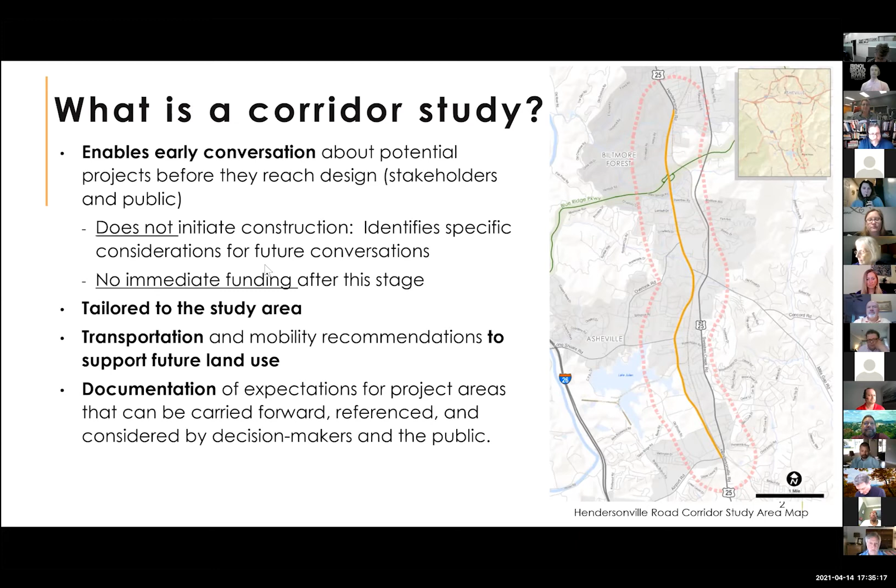Okay, fantastic. Let's go to the next slide, please. So why Tunnel Road? One of the mechanisms that led us to select Tunnel Road for a potential corridor study was that this area was identified in a couple of different ways for potential improvements.

One, it was identified for congestion mitigation improvement considerations. It has also come up through the SPOT process, which is an MPO related, data-oriented method for prioritizing future projects and incorporating them into the TIP.

We've also had conversations with other community members where Tunnel Road often comes up as a hotspot. We want to further those conversations in a positive way, because we know this area is both a regional economic driver and an employment center, and looking at current development practices and attention of late, this area is going to experience a redevelopment in the near future.

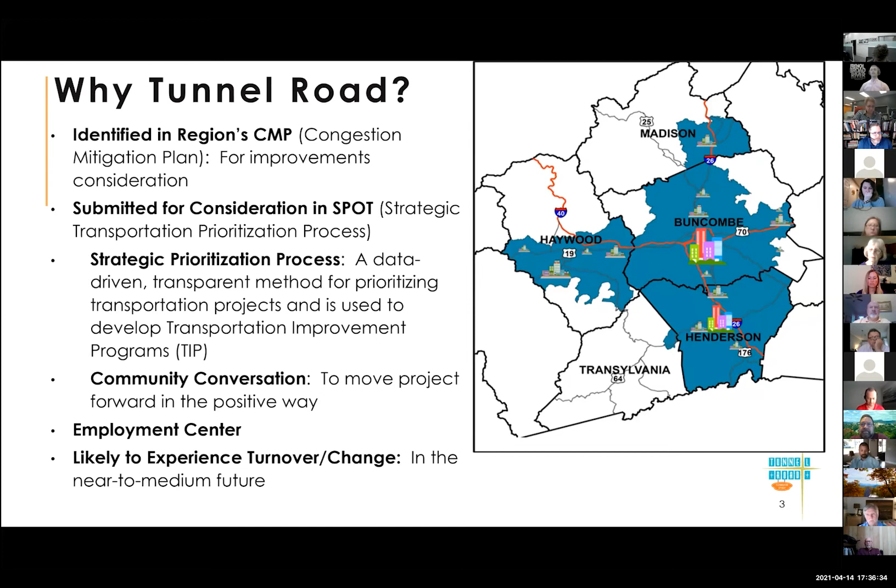So how did we get here? The corridor study program is a partnership with the French Broad River MPO, Buncombe County, the City of Asheville, and we work in conjunction with our NCDOT partners. The corridor study program started last summer. There are actually 2 projects currently being studied by the MPO, and a 3rd sister project being managed by the City of Asheville. What these corridor projects really do is the homework before we even start to consider any future potential actual project that would require funding or construction.

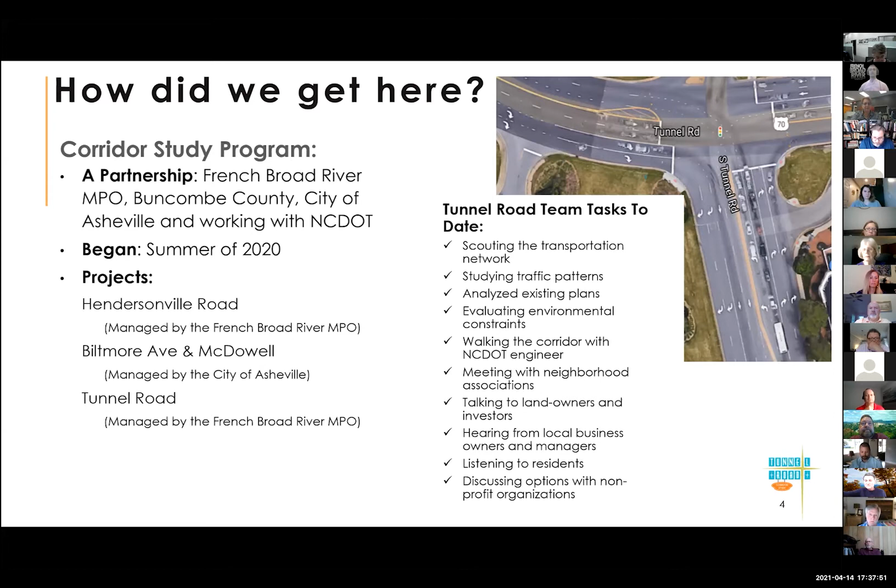So there's been a lot of that kind of homework being done. We've had our consultants study the transportation network, analyzing plans and environmental constraints. We've walked the area with NCDOT partners, as well as met with a lot of interested neighborhood associations, landowners, business owners, managers at various establishments, and listened to neighborhood community members as well as nonprofit organizations. So we've been doing a deep dive into this very small couple of miles, not even a 2-mile stretch, identifying the key items.

So on that, I am going to turn it over to our fantastic consultant team led by Yolanda. So please, Yolanda, take it away from here.

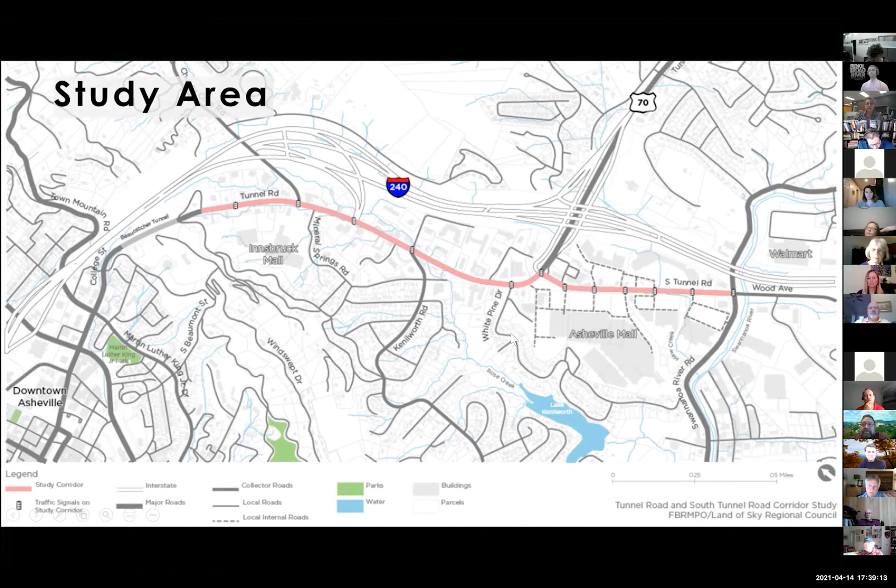We look at things like what the land uses are today. The map on the left shows all the red around Tunnel Road, and most of it is red because that stands for commercial. Not very many people are actually living on the corridor. In fact, according to the census we drew these numbers from, only about 240 people live along the corridor. You can see the right of way for I-240 there. But what's particularly striking, if you look at the area outlined on the map nearby, is that those few people are really working either downtown or at the hospitals nearby.

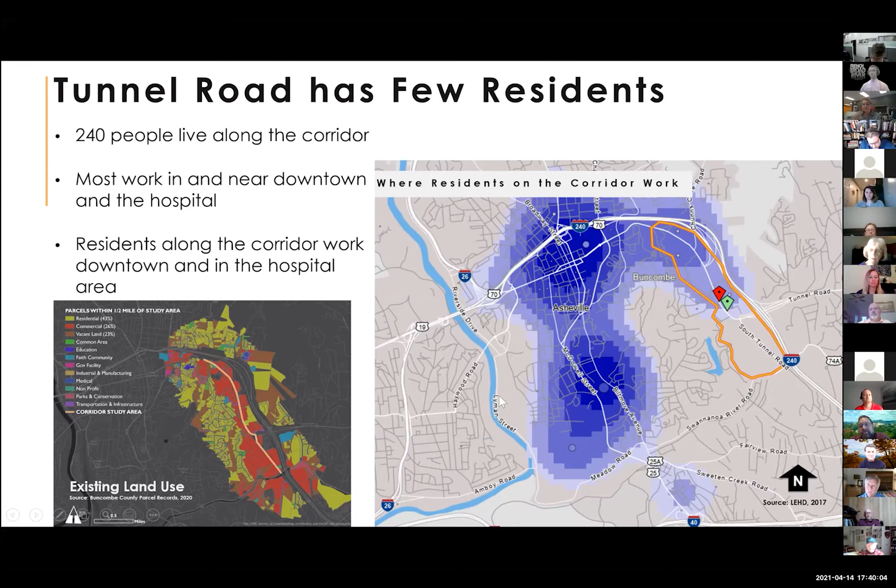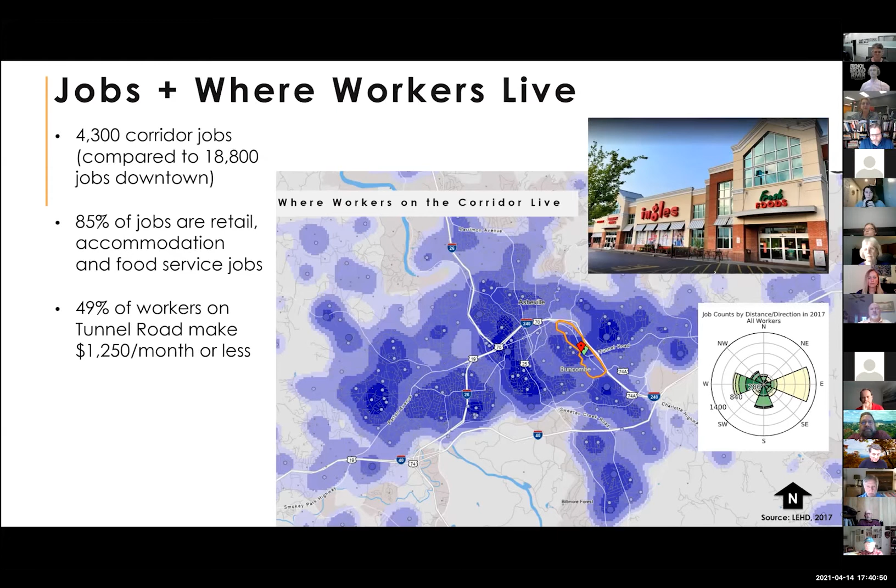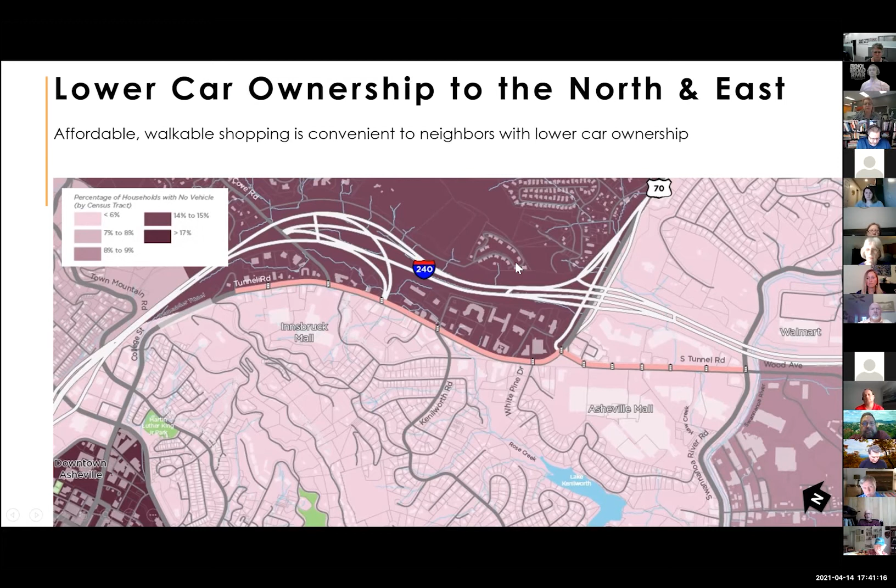We also see, according to 2017 census numbers I believe, that there are areas north of the corridor where people are living who are in high, low, or no car households. The darker color indicates that 14 to 17% of people have no access to a vehicle in the home. So they're counting on transit, walking, and biking to get around.

The corridor itself has a transportation function. One of the ways we look at roads is, what do they need to do? And this road needs to do quite a lot. It's an alternative for Interstate 240. The northern part of the road has a higher functional classification in the system than South Tunnel Road, which is considered a minor arterial. And it's critical for Asheville transit, ART transit.

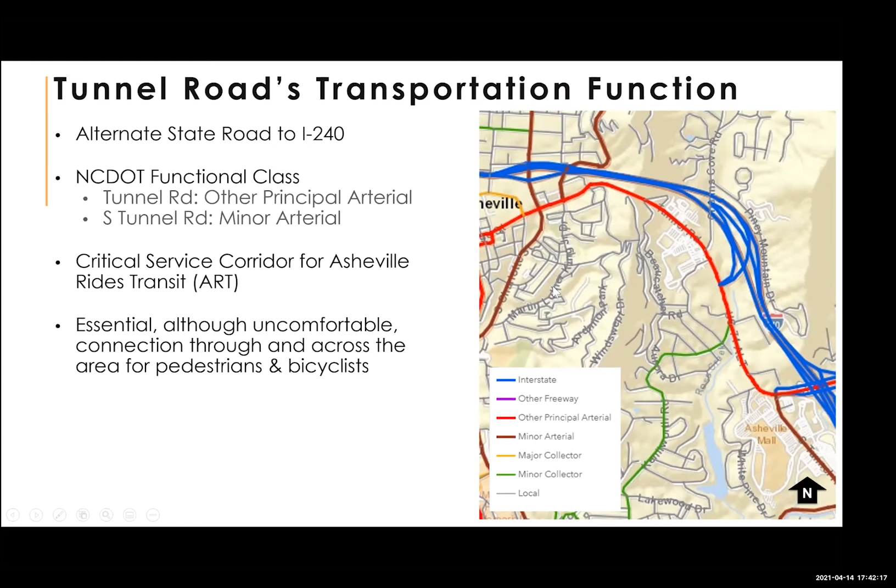There are many lines that traverse the corridor, and people are counting on it to get around the region on transit. It's really a major conveyor for people who need to get from place to place. And it's the only access for cycling, because the road network isn't very well developed. Christy Stout is going to be talking about that in more detail in a minute.

We also look at the demand on the road in terms of average daily traffic and how many lanes there are to accommodate that traffic. On a road like Tunnel Road, getting access to business is an important part of its function as well, and there's a certain dynamic that happens there. Essentially, the traffic numbers grow as you go south, and the road itself is larger in the middle, able to accommodate left turns, whereas as you get closer to the interchange at I-240 and South Tunnel Road, traffic is the highest in the area.

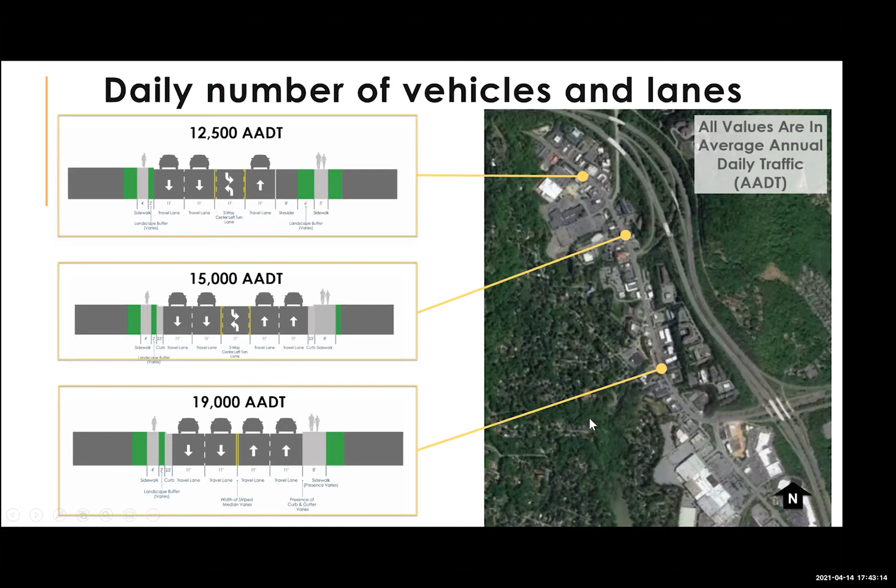I'm going to show you what happens here. Can folks see this? If you look up in the top corner, it's telling you time of day, and the colors are changing from green where nobody is. South Tunnel Road is showing traffic speeds getting lower because there's more congestion, turning red for a good part of the day. So there is some congestion, which many of you experience on South Tunnel Road. But by and large, Tunnel Road itself, north of South Tunnel Road, is generally pretty free flowing, and sometimes the speeds get high there.

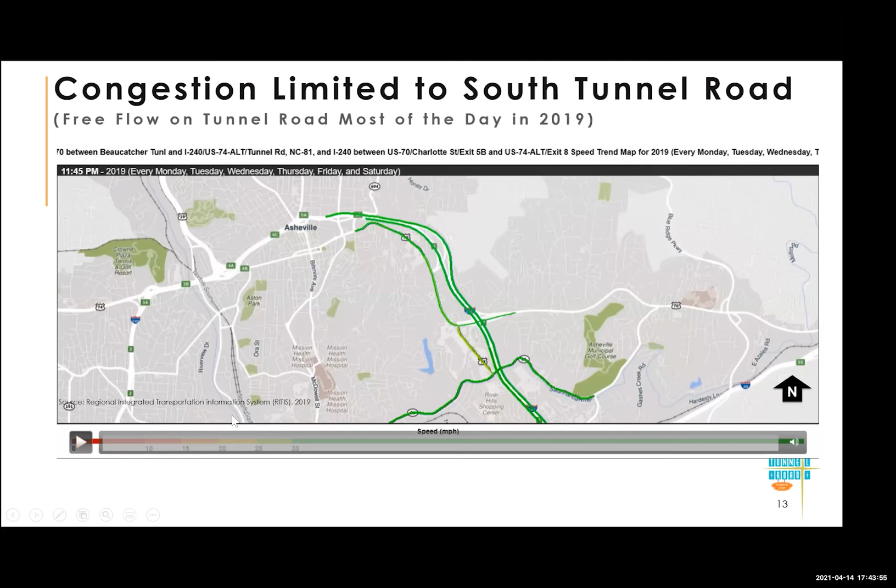So what I'd like to do at this point is turn this over to Christy, who's going to do a deeper dive into some of the transportation data that we saw and how it's affected some of the goals of our work.

So, Christy Stout. Thank you, Yolanda. What I'm going to go through briefly is to touch base on, in our initial review of this corridor, some of the issues we found and how they feed into this process as far as how do we determine what we need to do to fix any current issues. So I'm going to cue this up and hand it over to see if that matches what we're hearing from people's experience along the corridor. Then JP is going to step through more of what did we do with that information, and what are we looking to do to provide some solutions.

One of the key elements we've really been tasked with is how do we tee up this corridor for better integration of land use and the transportation network - not just our existing land uses, but the future land uses. The photo on the right is an example of what was previously proposed for the Asheville Mall redevelopment. The issue is we have to accommodate those future developments, but also get ahead of that. If we need to fix the transportation network, you don't want to be widening a road into a building that was just built last year. So it's preparing for those partnerships and ensuring that the system is safe and efficient.

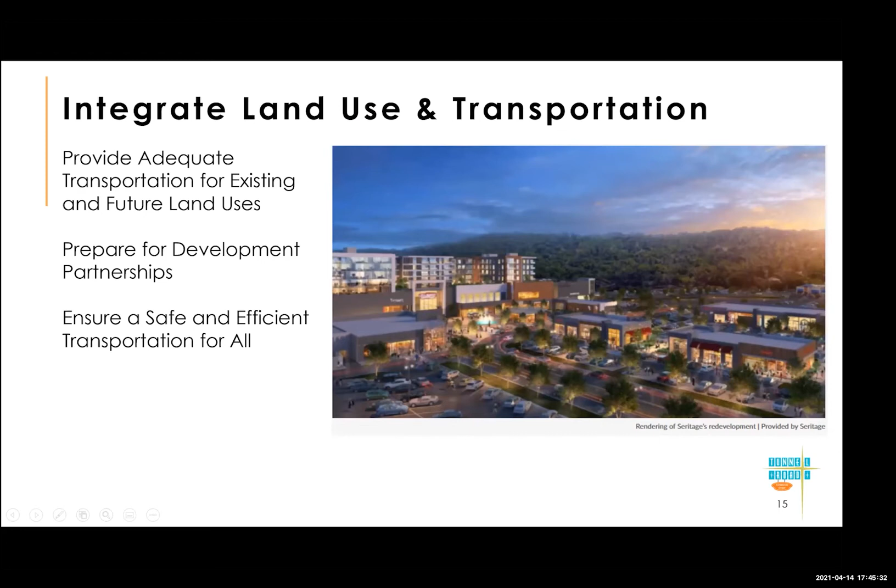A lot of these next slides really focus on that merge between safety and efficiency. So this slide, we took a look at the safety along the corridor, and this one's really telling. If you look at the number of crashes that occurred in the various segments, starting at the left near the tunnel, from the tunnel to Chunns Cove Road, there were 84 over a 5-year period. Going to the right, you'll see the different segments and how many crashes were reported. That involves a vehicle being towed from the scene, and it gets reported through the police files.

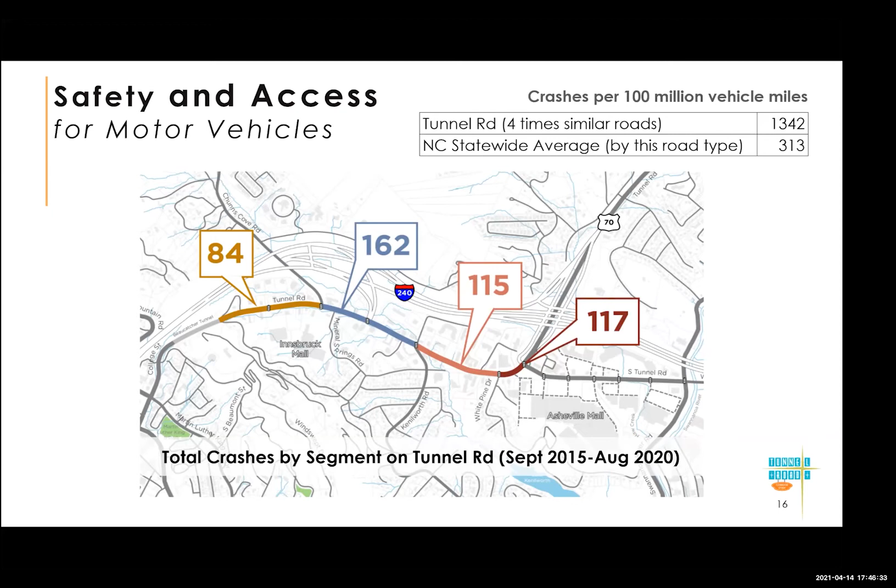So Tunnel Road, when you look at the entire corridor from the tunnel to South Tunnel, had an average crash rate - this is how we look at things in our industry - of 1342 crashes per 100 million vehicle miles traveled. It's a calculation we do based on the amount of traffic that's out there and how many crashes occur. The statewide average for a roadway like this, with 4 lanes of traffic and a center turn lane, is 313. So it tells you we have an issue here - this is over 4 times greater than what you would tend to see with statewide averages for a corridor like this. In the next slide, we look a little bit more at what is the source of that.

One of the things we started looking at, and I think it's obvious to most folks if you've driven this corridor, is the number of access points along this corridor. What I did here is just took one driveway and showed you how many conflicts you could potentially have for a vehicle turning right or turning left out of that driveway, turning left in and left out. And there you have 13 conflict points if you include pedestrians.

This does not include cyclists. So if we had bike lanes, that would even be more. So if you take that 13 for one driveway and you add 10 in a short period, you're up to 130 conflicts, not even considering driveway to driveway conflicts.

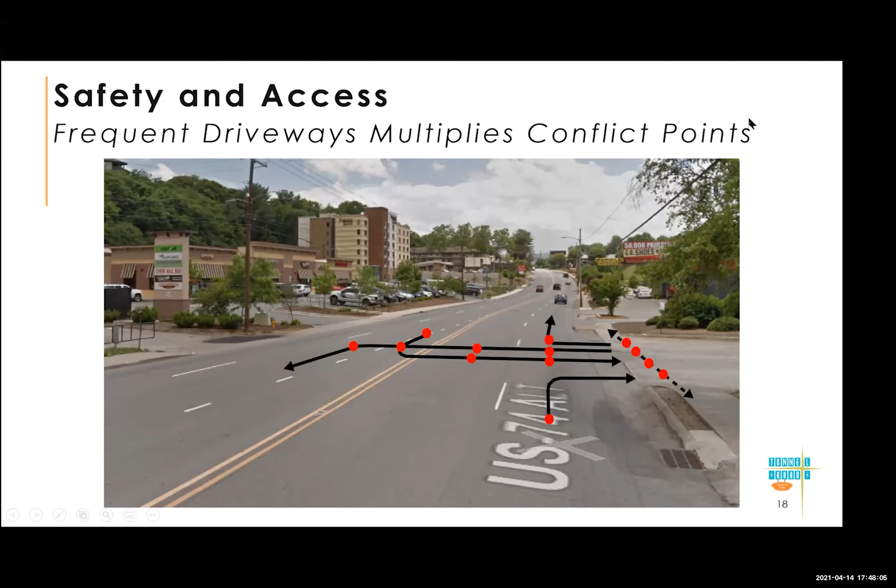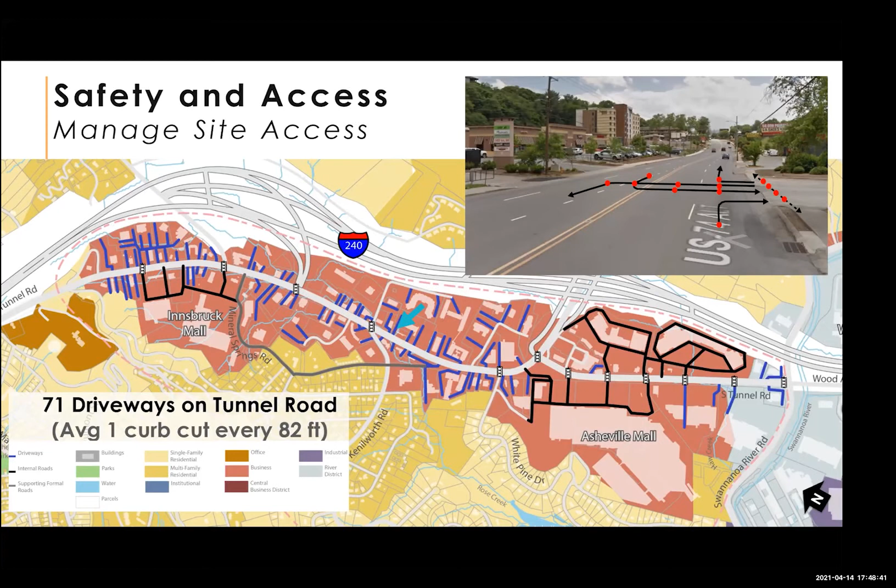So this next slide really does a good job of showing you what's going on here on Tunnel Road, and this is really likely the source of a lot of the crash rate issues. The light blue lines here on this map are the little signal indications, and the blue lines are all the driveways. Over Tunnel Road, not South Tunnel Road so much, you can see that's much better as far as access spacing. There are 71 driveways on Tunnel Road, and that's a curb cut every 82 feet. So it just gives you an idea of what we're looking at.

So it's like we need to fix some of these issues that are contributing to safety and congestion. So that's the safety and access piece, broadly. And then there's also, Yolanda kind of queued this up.

So some of the things we need to look at is how do we improve access for all, not just those that have a vehicle. Some of that will involve fixing sidewalk gaps, improving bus stop amenities, improving crossings so people can get to the bus. I'm going to go into that on this next slide.

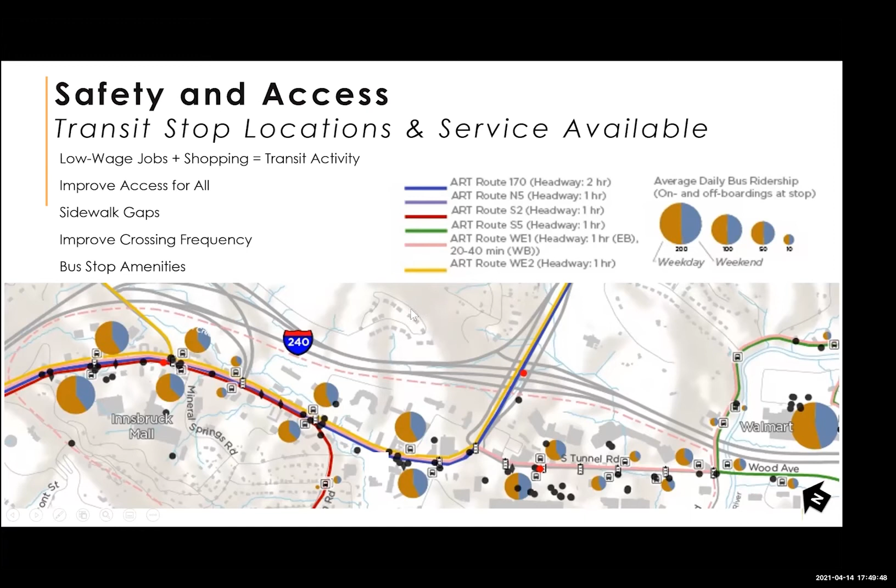So that kind of fuels the whole bicycle and pedestrian element. And is that safe? Are people able to get to transit safely?

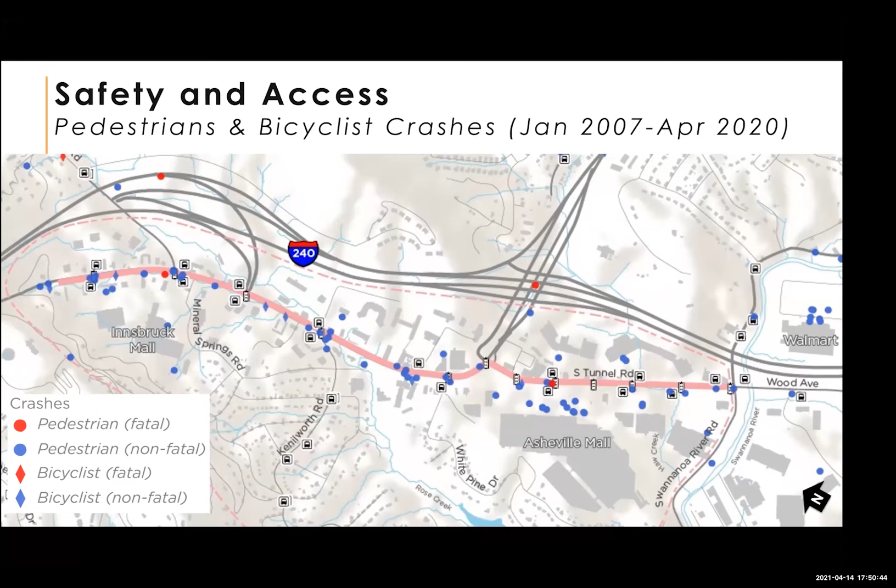And so this next slide shows why that's important. If you can go back one, Yolanda, it was regarding the crossings. So you can see in that photo in the top right, yeah, the crossings photo, next one.

So I'll talk about it briefly until she gets there. It's the next slide, Yolanda.

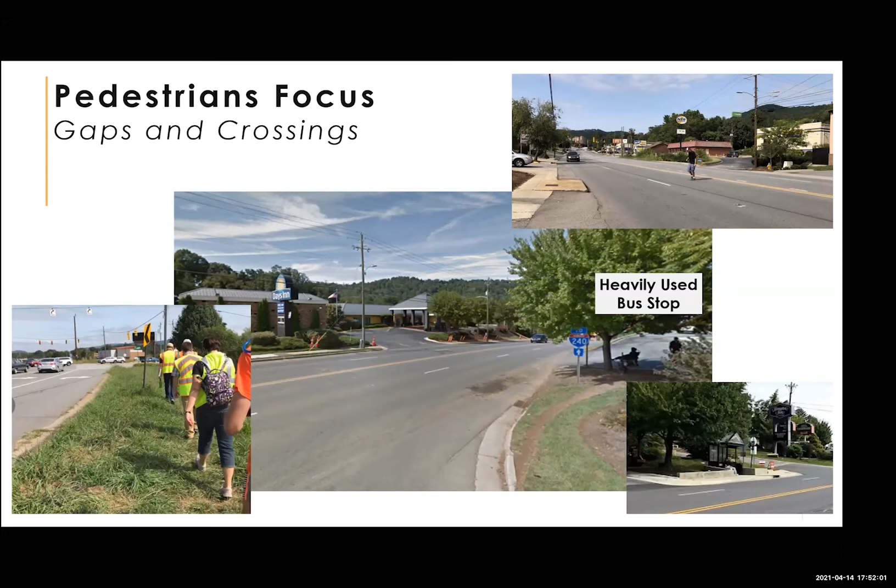You can see the photo there on the top right. There are 3 folks jetting across the road, over from the Fairfield Inn to where the Waffle House is. You think, well, why can't they just use the signal? You can see the signal in the picture. If someone starts at the Fairfield Inn and wants to walk to the Waffle House, that's 1,300 feet of extra walking, which at a normal walking pace could be 6 to 7 minutes. Add sitting at the signal waiting for it to turn green, and it could be a 10-minute diversion when all you want to do is walk across the street.

If we don't get those crossings frequent enough, you're going to be encouraging people to cross illegally. That is really something we look at when we're trying to improve pedestrian safety.

And so with the next slide... There's a little lag, Christy. I'm sorry. Sure, that's fine. Thank you, I know these are always tricky.

The last thing we're really looking at in developing the solutions, and you'll see how this all plays together, is the lack of bicycle facilities. When you look at that network map that Yolanda showed earlier, this corridor is a primary route for transportation, and it is a gap for cyclists. There's really no way to get through town in this area that's flat, safe, and efficient. So there are limited alternative routes.

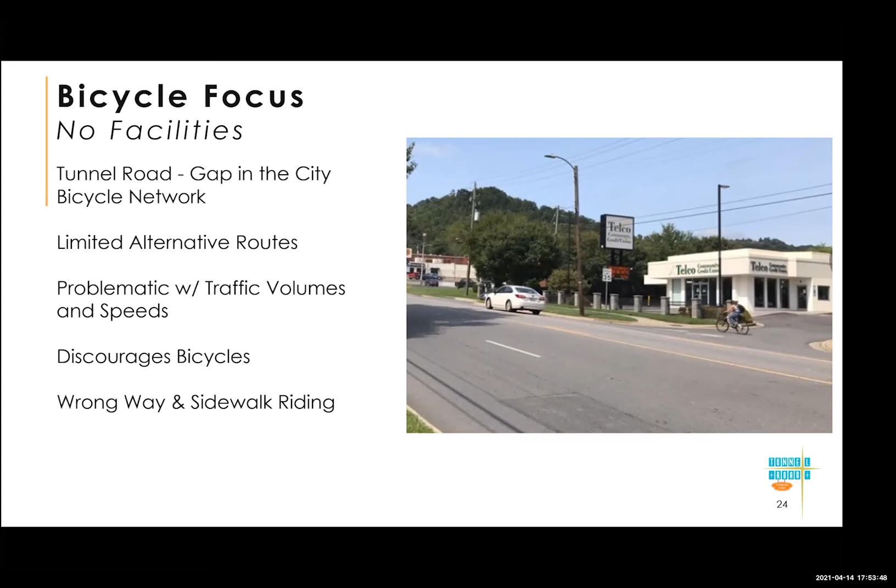Well, there is a walkable, bikeable vision for this corridor, and we need to develop a system to support that vision. So from there, Christy's going to talk a bit about whether that aligns with what we're hearing from you all, and I'll turn it over to her.

Great, thanks Christy. So I'll cover the engagement process. Before I go through the slides, I want to address a couple of comments that popped up in the chat box about Homeward Bound's acquisition of the Days Inn. We're well aware of that and have had multiple conversations with the Homeward Bound folks and with the city, trying to make that area one of the catalyst project areas, just because we know it's a dangerous crossing. It's across the street from Asheville Terrace, and we're introducing a lot more pedestrians to that area. I just wanted to acknowledge that.

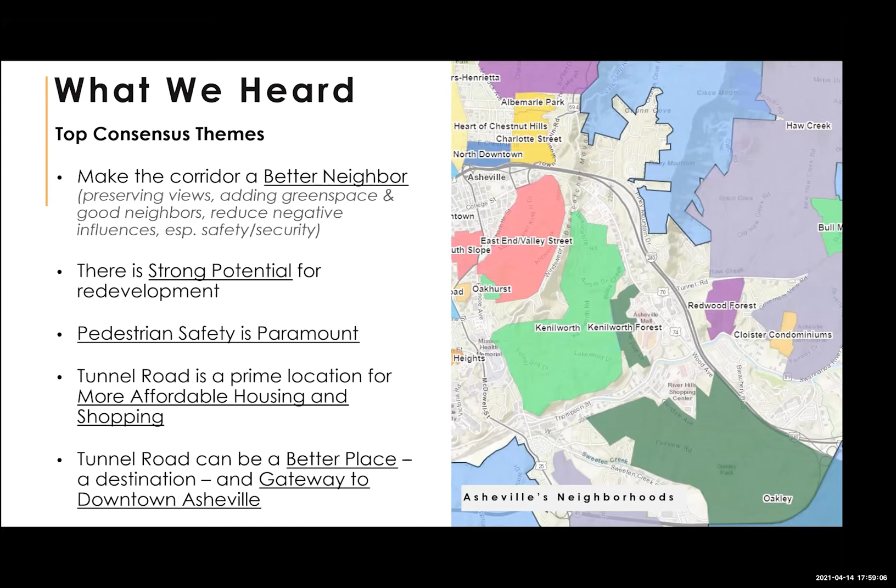And then, so now I'm going to hand it back over to Christy, or is it JP now? JP.

Great, thank you, Christy. So with this, we've talked about where Tunnel Road is today, a little bit of that analysis, along with some of the input we've gotten and how we've tweaked that into our transportation recommendations that we're presenting tonight.

Part of our recommendations are beginning to say, well, how do we begin to align those? How do we begin to align some of our solutions with some of these network solutions? So as we do that, I want to take you through a little bit of the geography and topography of the area.

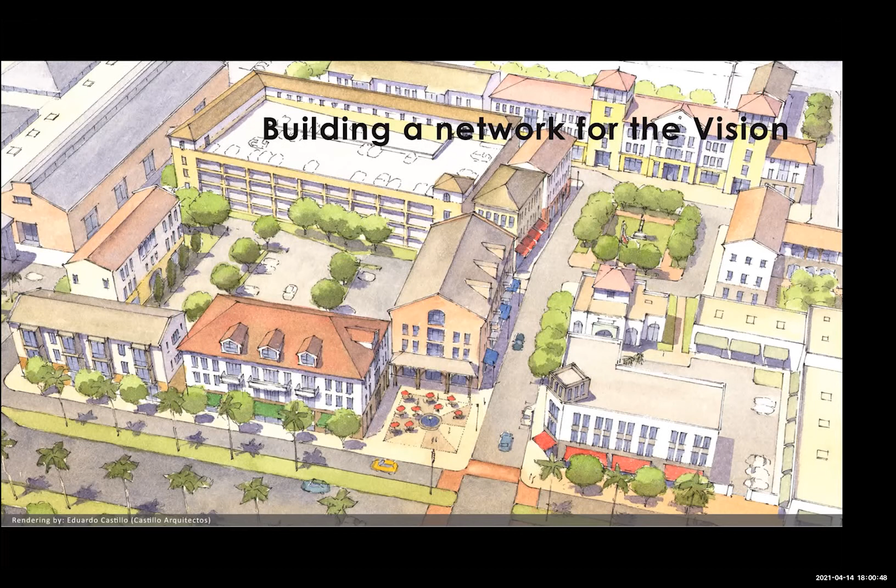Most of you are familiar with the mountain ranges, Piney Mountain and Beaucatcher Mountain on each side. So Tunnel Road sits in between these two mountains and forms the foothills and the valley between them, as well as draining downwards towards the Swannanoa River.

You can see that Tunnel Road sits as this low spot in the valley and foothills, and also the way that I-240 wraps around and parallels it going into downtown creates a bit of a barrier. That creates a very unique landform and development footprint for what we have.

It creates a larger area where we have land on both sides of Tunnel Road - that's node 1 - and then down by the Asheville Mall and some of the developments on the other side of South Tunnel Road, node 2. And then there's this really skinny spot where the topography, the interstate, and some of the grading and existing residential neighborhoods create a very thin spot, which I'm calling the connector.

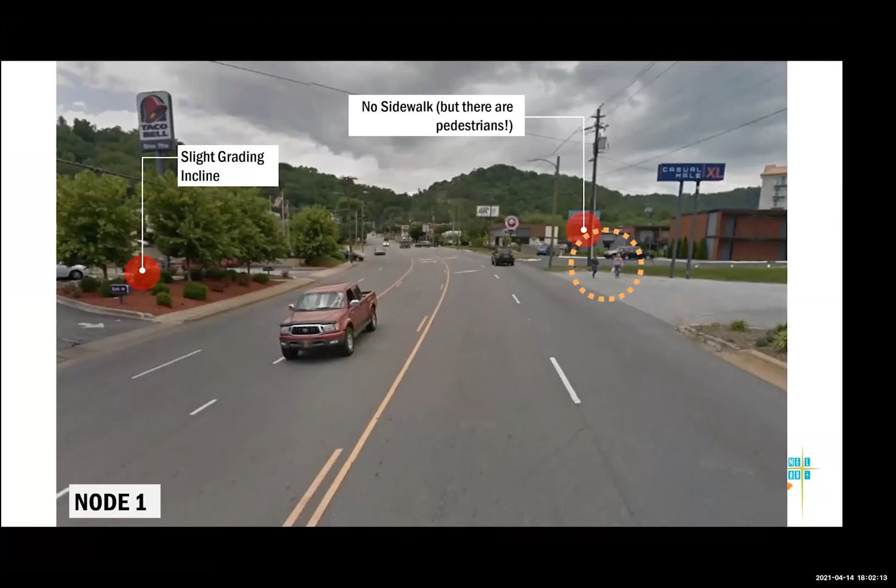We can see that on the ground. This is in the northern portion adjacent to the Innsbruck Mall, and off in the distance is where Tunnel Road actually becomes a tunnel and heads towards downtown. You can begin to see a slight grading incline coming in on the roadway. And to the points made earlier, you can see a couple of pedestrians walking with no sidewalks on that side of the road.

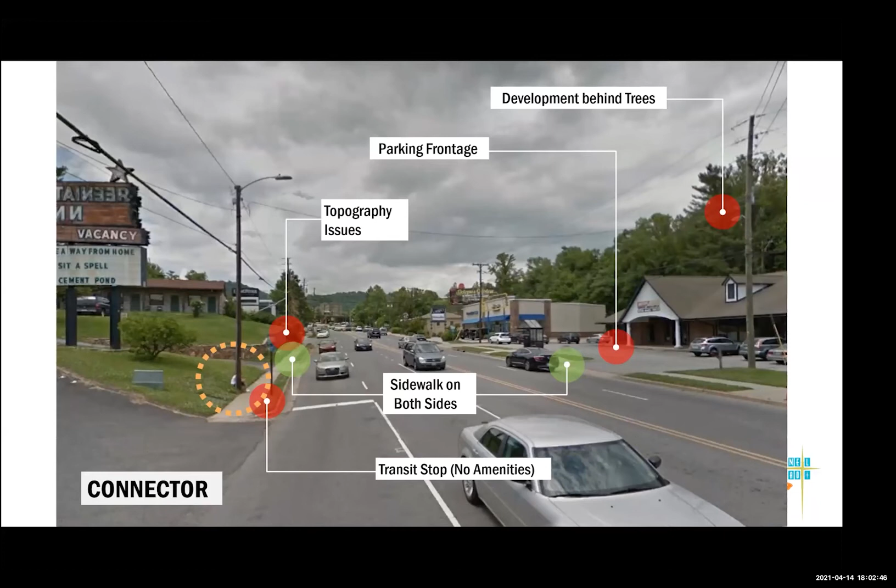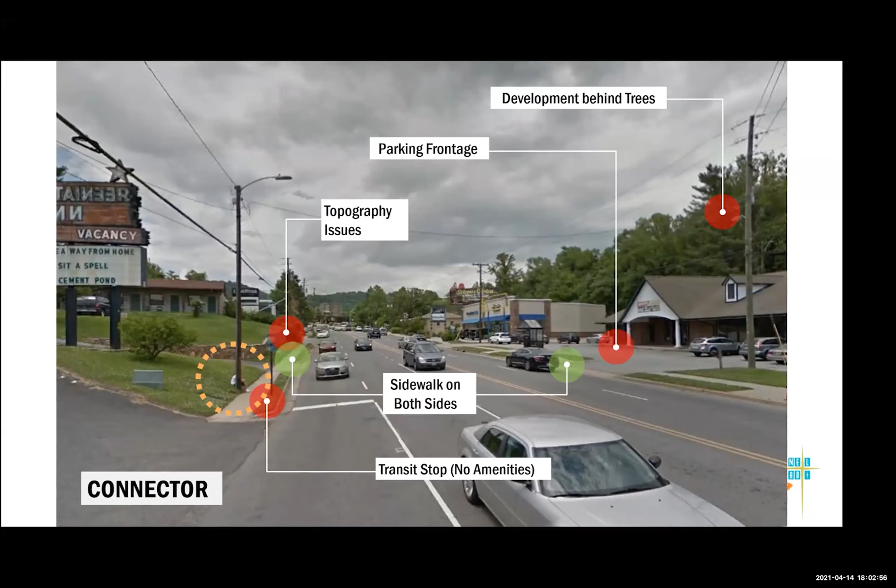Coming into the connector, or that long neck piece, you can see how there's development behind the trees on the right side. So that's a very steep decline, and then it hits a couple of those commercial properties. That is the depth of those properties to the tree line from the roadway.

A similar thing is happening on the other side as it starts to slope up towards Beaucatcher Mountain. Here we do have sidewalks on both sides, but some of the topography issues have created a situation where walls have to be built for the roadway to come through, creating really tight pinch points for trying to do anything on the street.

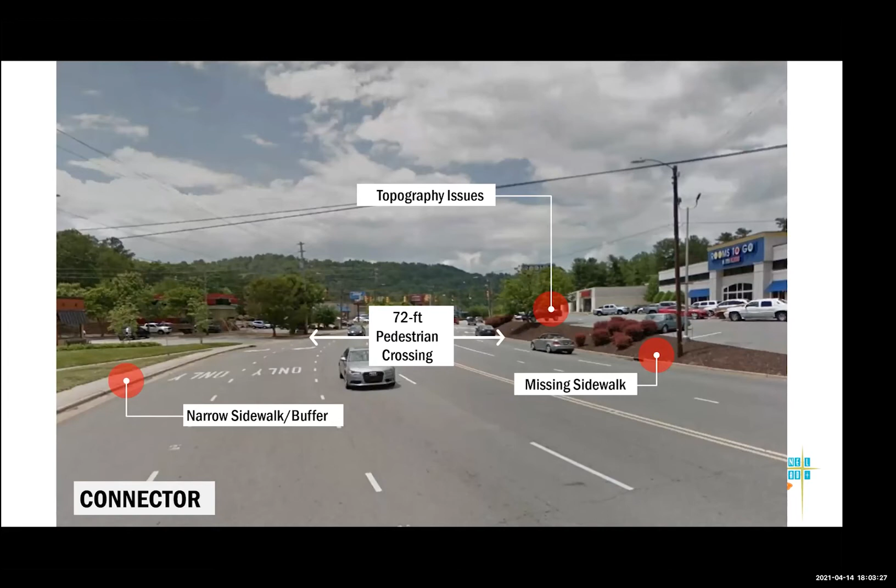As we come into the turn just before South Tunnel Road, we have a similar condition with the topography. There we don't have a sidewalk because it's hard to create that linear, vertical, or horizontal space needed without creating a lot of walls. The other thing happening here is as it widens out to serve the interstate and the turn to South Tunnel Road, the pedestrian crossings are becoming wider and wider.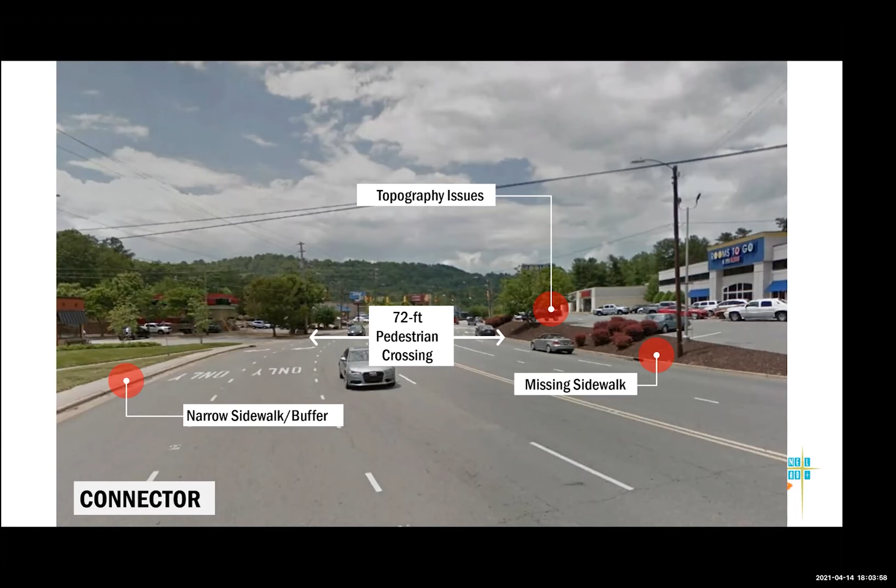Here we have 72 feet to get across the street from each side of the two parcels.

As we get onto South Tunnel Road, you can really see how the topography issue creates a situation there, with the switchback staircase coming off of the property on the left side, as well as some walls.

We still have a really wide pedestrian crossing, and you can see the pedestrian standing there on the right side. Our folks tell us that she's still standing there right now waiting to cross because it's such a long distance to cross.

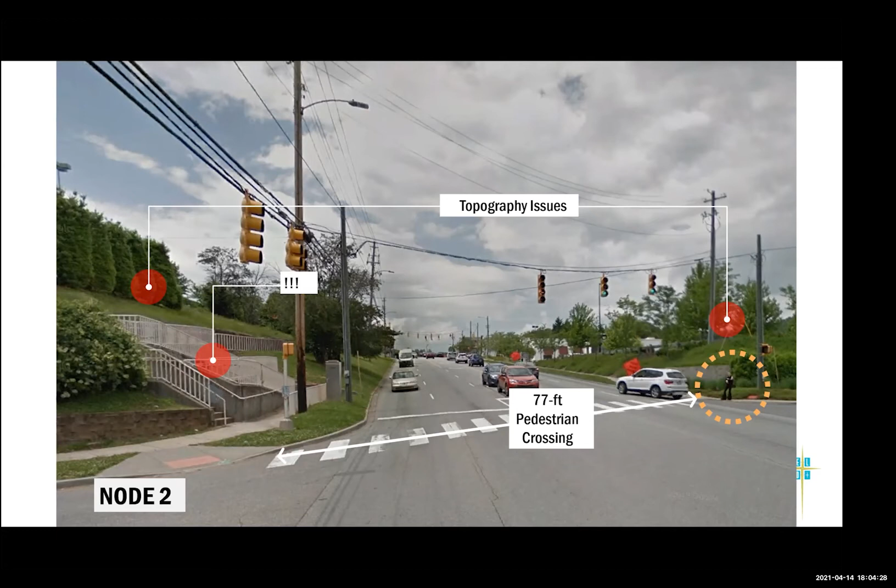So when we think about how to merge the vision of the urban center land uses and the economic development that will come with that, revitalizing this corridor and making it a good neighbor, we think about the structure of streets and blocks.

On the left side of this slide is an outline of downtown Asheville, the streets and blocks just on the other side of the mountain. The blue lines represent the streets, and you can see the buildings compressed together. The whole square represents about 67 acres, with about 30 blocks in that part of downtown, equaling about 2.2 acres per block.

I've broken up Tunnel and South Tunnel roads on the other three slides, all at the same scale and size. Node 1, the first urban center, has 6 blocks, about 11.2 acres per block. The connector areas have about 5 blocks at 13 acres per block. And the Asheville Mall area has just 3 blocks at 22 acres per block.

When we think about that, and the walkability of downtown and the economic development associated with it, and look at these other areas, we see there isn't enough infrastructure to support the kind of development or create the vision referred to in the Living Asheville comprehensive plan.

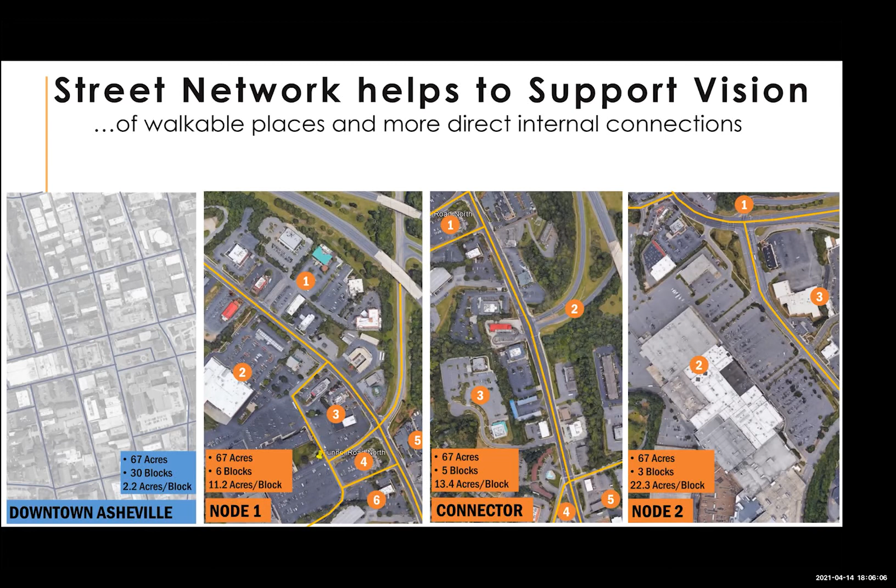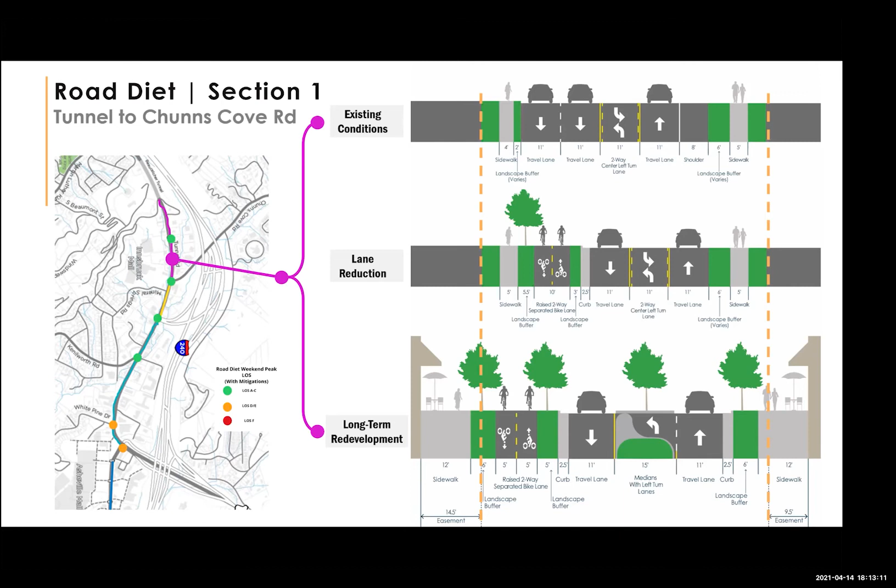And again, it's dependent on those intersection improvements. The last cross section at the bottom shows what would happen long-term as the development piece comes in. You can see building fronts, wider sidewalks, dining—as land use changes, you really get to that vision the city has.

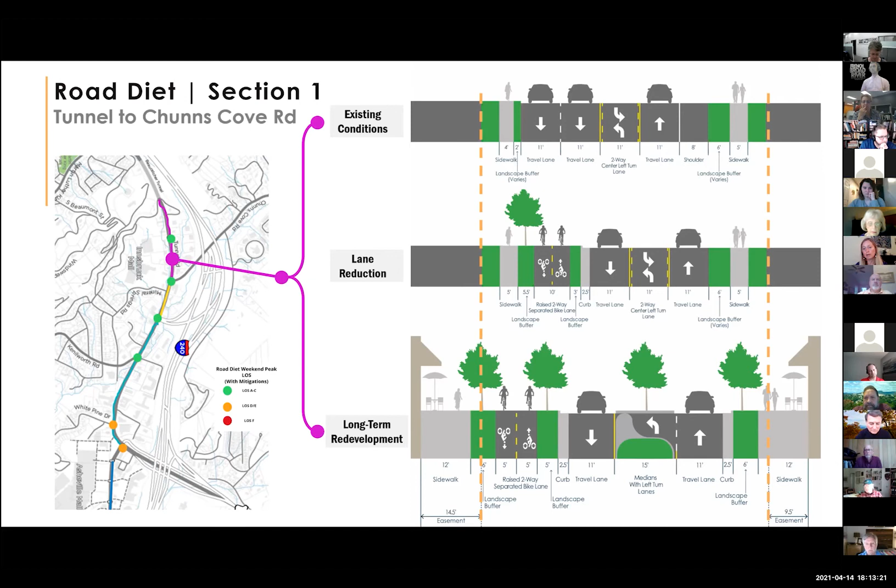So really what we're doing is trying to get ahead, fix those things along the corridor that we can to tee up that long-term vision. And this will take a long time. And so when you get into these other sections—oh sorry, I had one more note—we wanted to talk about the Tunnel Road, Chunns Cove intersection.

When Yolanda switches slides, you'll see there's a roundabout option. We looked at that as well, because that's one of those things that can really calm traffic, slow speeds, and facilitate access management. So if you make a right turn out of a business instead of a left, you can go down through the traffic circle and continue as if you had made a left turn. There's things like that that could be looked at.

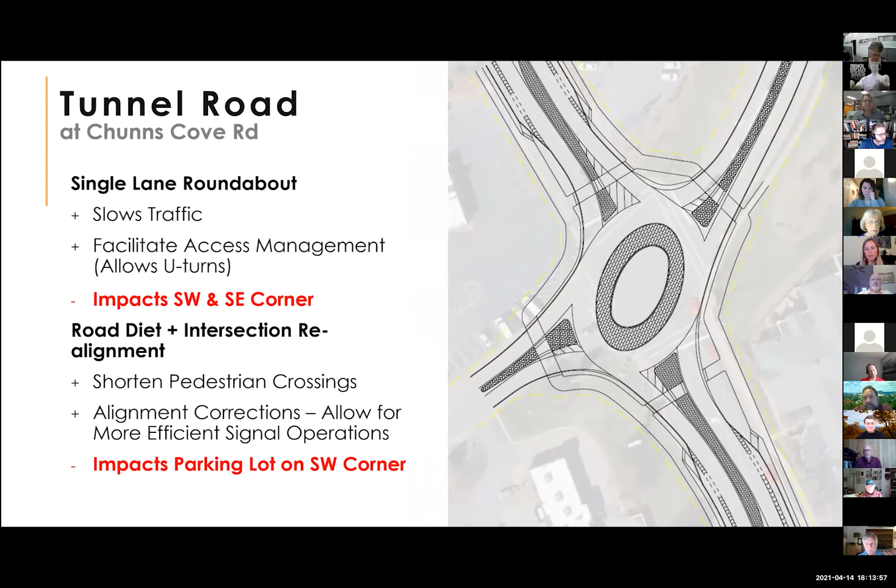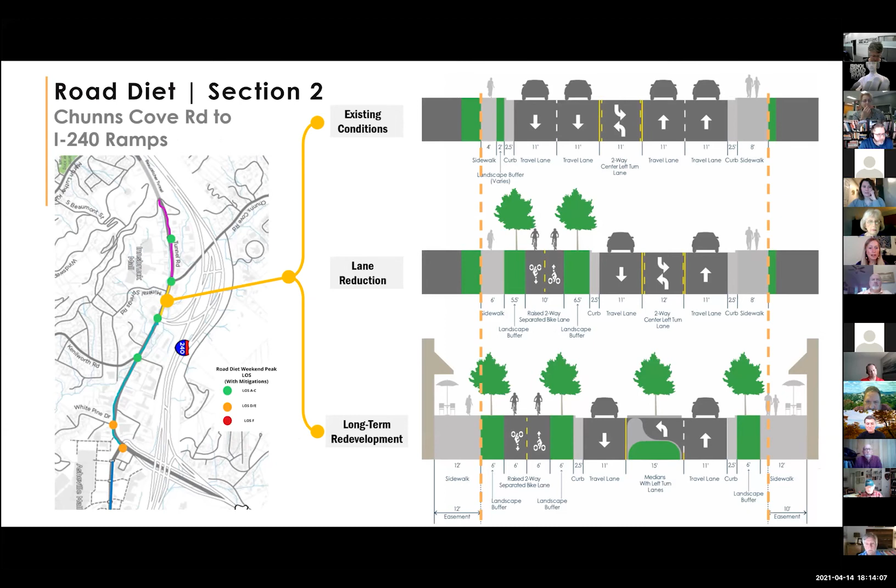And we also looked at just realigning that intersection. So some of these are things that are going to have to be vetted a little further. And you're going to see this repetition through a lot of these slides and similar recommendations. And if you go down to the next section—

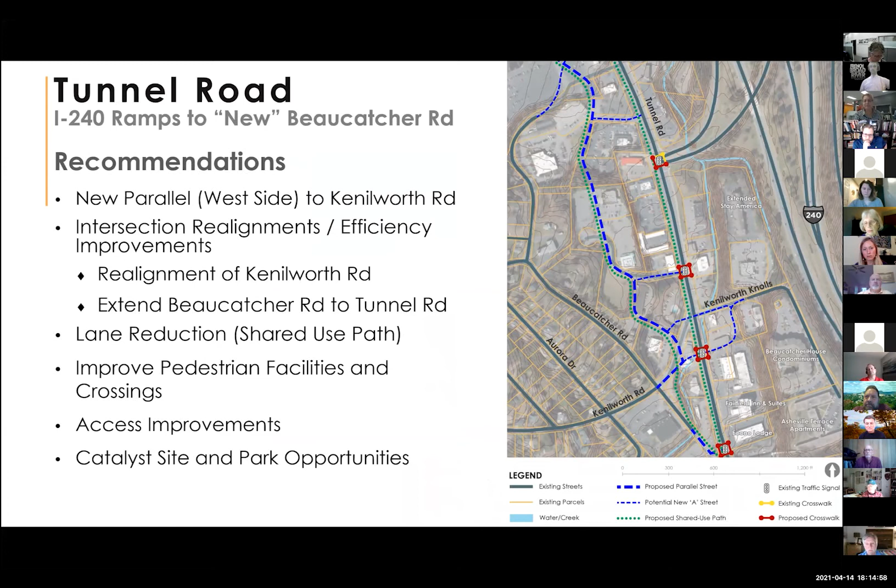And then on the next slide, you'll see a very similar cross section. And so then we get down to the White Pine area and in front of Buckstone Place. One of the things here you're going to see is a little more creative, because what we start getting into is this transition to the highway interchange ramps, where the road really widens out.

So to do this cross section of 3 lanes, you really have to start thinking about how we do that transition. If you've ever done this, you come from the mall and make a left turn onto Tunnel Road to get up to the 240 ramps. There are 2 left turn lanes, and you could be in either one. Once you make that turn, you have to merge, and there's all kinds of lane shifting. To do all that between the South Tunnel intersection signal and the White Pine signal—that distance is very short. And we think that's contributing to a lot of the crashes there that are high.

And so if we could extend that distance, give people more time to calmly make their lane change, do some tapers, we would move that intersection up to Buckstone Place, where Yolanda was hovering the cursor. That would allow us to clean up that area, make it safer, improve the traffic flow, and improve access to the neighborhoods that enter Tunnel Road from White Pine.

So it really serves a lot of benefits and helps tee up reducing one lane on the road. One other point I want to highlight is the little circle to the left, north of White Pine—it's a traffic circle. What we're thinking is that to realign White Pine, there's a large parcel there. If we could realign White Pine over to Buckstone Place and separate those signals a little more, then we have a crossing at some of those high-use bus stops.

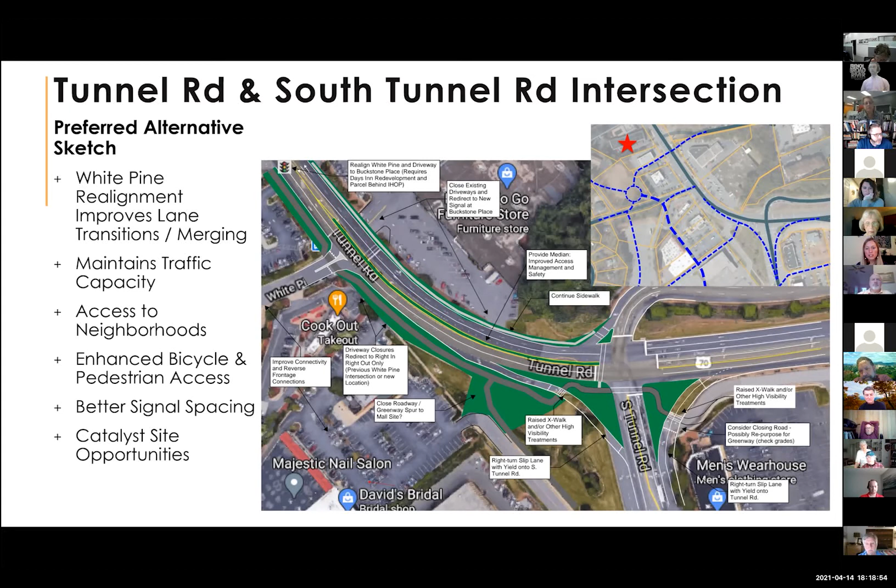So it really ties into that well and maintains capacity. It's tied in with the White Pine Road realignment, so it provides better access to neighborhoods and helps with the merging. It's really just a safety focus on this one.

And so this last one is that same section—really the same cross section, nothing really new here.

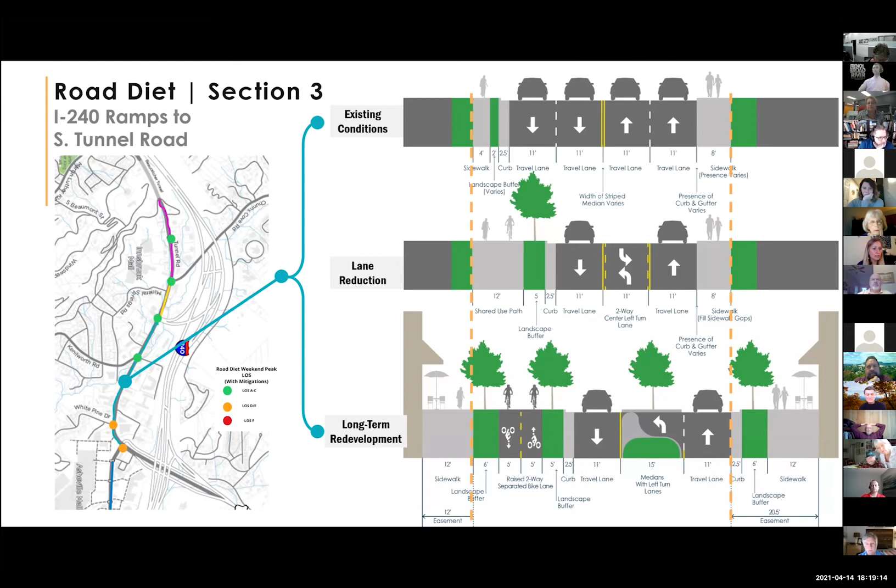And so then we move on—we just want to give a little time to South Tunnel Road. In the next slide, the image on the right shows a little bit of what we're thinking about, ideas on how future development could complete a grid network and help take it so Tunnel Road or South Tunnel Road doesn't have to do all the work.

So you have these other little network connectors that allow access to businesses and take that pressure off. This section of the corridor is a lot better from an access management standpoint, but it also has issues where those side streets don't line up right, so they're still having that signal efficiency problem we're seeing on other parts of the corridor. I know on the holidays, this corridor is tough. A lot of it comes down to if we could get these intersections realigned and get the signals operating better, we're going to see a huge improvement for everyone.

You'll see the green line through that image shows how we would do a path there. We're looking at an alignment that would potentially go behind Whole Foods on the north side and then jog out to South Tunnel where there's no sidewalk as you get close to Swannanoa River Road. That would complete the missing pedestrian network, providing that full trail connection. As many of you know, there's a planned greenway along Swannanoa River Road, and it would connect into that.

So it really does a nice rounding out of the network, and I think that's the main thing. There's a lot of details here. This section would not be a lane reduction. This would really, I think some of the benefits would come from that grid network, improving crossings, and then maybe some greening, streetscaping, things to make it a little more inviting.

So you'll see the landscape median in the middle section here that's shown on the right. And on the bottom, future land use will look a little more to what we're seeing up near the Whole Foods sites, where the buildings are on the side of the road and there's seating areas, and it just creates more of an urban environment.

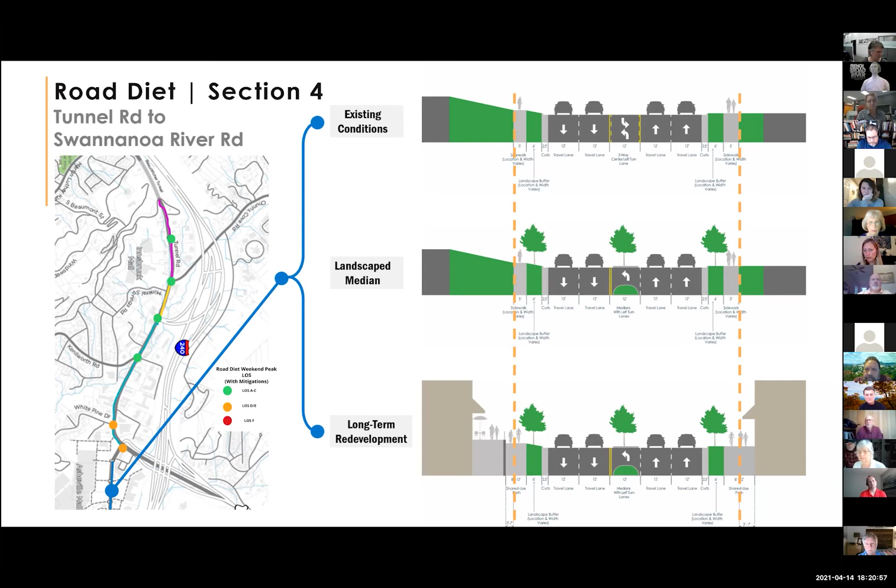And so I think that was the last slide. And what we want to talk about now is, how does this kind of play out? This is a lot of big goals. Are we going to do this tomorrow? And Christy's going to cover how this kind of plays out.

So as Christy mentioned, things aren't going to happen tomorrow, although we have recommendations of what could happen tomorrow to improve some things. But the way to look at this is that it is a long-term vision. Tristan and John with the MPO, when they put projects into that document called the STIP, those projects usually take 10 to 15 years from initial concept to planning on the ground.

So we'll look for the smaller wins, more immediate. There are some development projects along the corridor that the city can start working with developers to implement some things as those newer projects come about.

And just to talk about the bigger, broader process, if we think about the long-term vision and what happens right now, most of this is in the master planning or visioning stage. The whole corridor would get broken up into smaller projects to implement along the corridor. Those would go through NCDOT's STIP process, because that's one important thing that I think we glossed over a little bit. This is an NCDOT road.

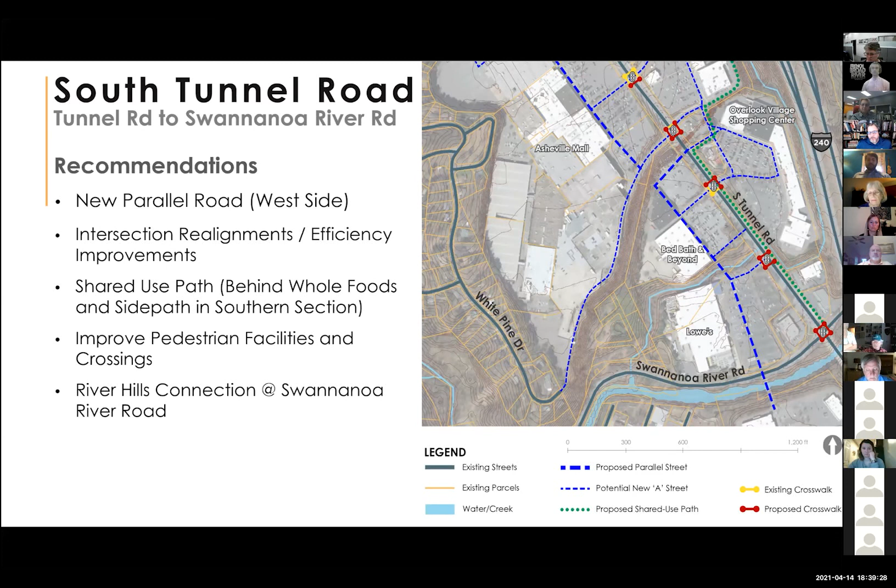It would be like a two-lane roadway with parking on either side, landscaping and side amenities, sort of a streetscape kind of roadway. And the idea is that that would be...

Yeah, there it is there. So the idea would be that's the kind of width of street that we're thinking would get built over time and through redevelopment.

It can also begin to fit into existing drive aisles, which can begin to be converted into something that is not just an area for cars to access, but actually have sidewalks and all that kind of stuff.

So the thinner dashed roads that you're seeing are the perpendicular roadways that could be formalized coming from South Tunnel Road and Tunnel Road onto that new parallel network street.

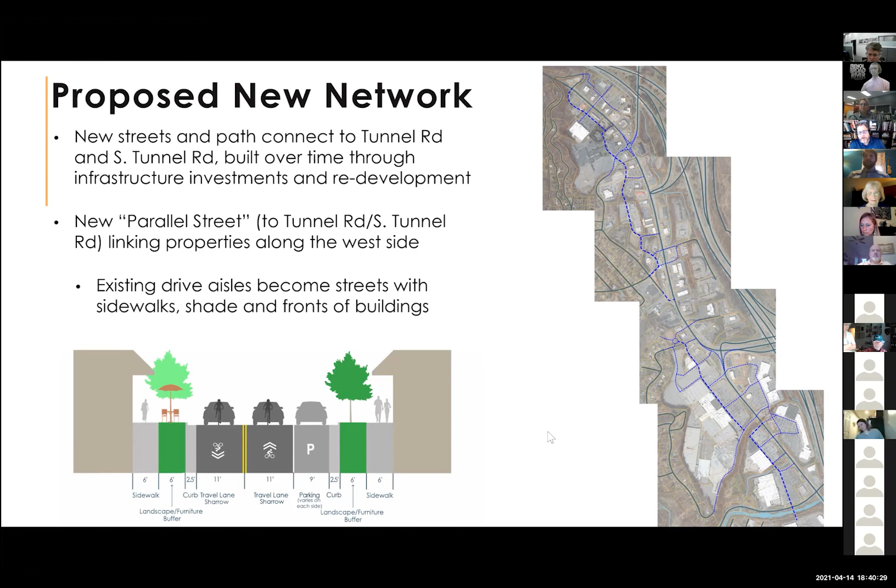And those would be similar to some of the roads that are out there today, just with added sidewalks or added aspects of walkability and bikeability. Those would begin to form the block structure along Tunnel Road that we talked about.

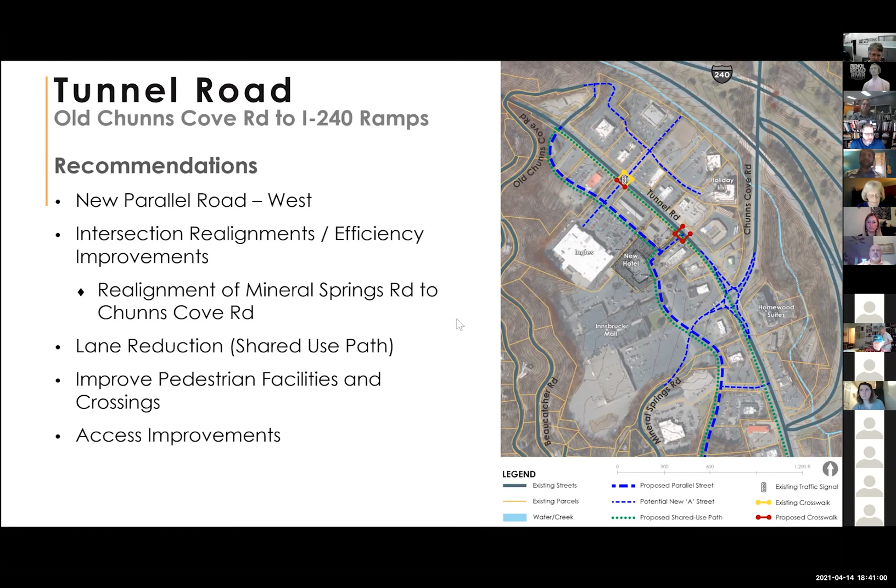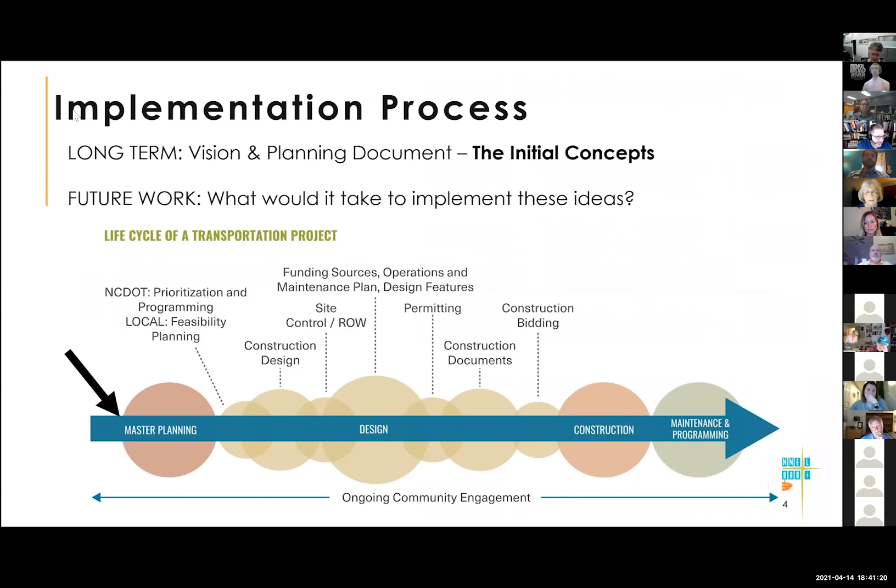Just one point to reiterate, because we're getting a lot of comments: keep in mind that chart I showed is the initial starting concept area. Anytime a project gets formalized, whether through the city or through the MPO and NCDOT process, there is additional community engagement. So some of these issues with White Pine, there will be future opportunity to talk through those. This is just a broad plan, not a guarantee that any of it will happen.

So I think that wraps us up for questions. If anybody else wants to chime in with questions, or if you want to say you missed mine. Some folks had points for us to consider, and we certainly will capture those, and appreciate you sharing them. What else we got?

There's one question I could touch base on, White Pine adding traffic. I just wanted to clarify, JP, you may want to talk to this, but I believe the connection shown south of the mall, if it were ever to develop, goes from White Pine down to South Tunnel. I actually hadn't even seen that on your new map, JP. I think it's more meant to provide additional access for White Pine residents out. It's not set up topographically and direct enough to be adding traffic where someone would come from the mall, use White Pine, and go all the way around to go into the city. So I don't think that's really the way it's set up.

Yeah, I agree with that. The intention was more of an outlet for the development that may occur there to have a way to access Tunnel Road. To the point made in the chat about the narrowness and tightness of White Pine, that's just not going to be a feasible route to try to get to Tunnel Road when it's easy to take the new road, or that potential new road, directly east. So I don't really know that would create any additional traffic on White Pine Road. And if they find that it's not feasible, it may be that it could be a trail connection.

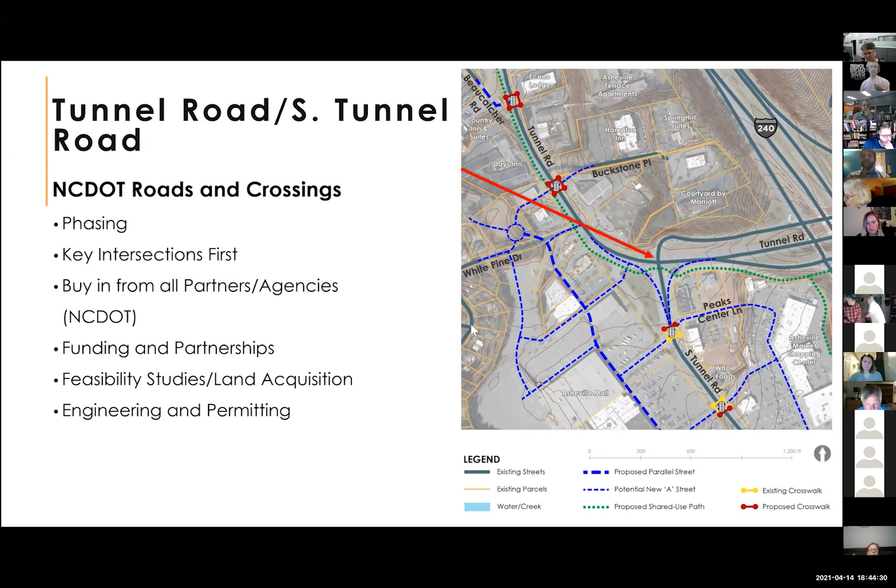Another question: where's the trail plan to connect Swannanoa River Road to the tunnel? So we might need to go back—that map may cover it. All these maps have a dashed green line, and you can go back, Corinne, later and look at these. The dashed green that runs along Tunnel Road on all those would be the side path, so that would be the trail. Then once it gets down to Wood Avenue and Swannanoa River Road, the Swannanoa River Greenway is running on the south side of Swannanoa River Road. So it'll be under the Wood Avenue Bridge, and there'll be some connections to get to that.

And Christy, do you want to give an update on where that is? Or I think Lucy's on the call too. If Lucy wants to chime in—but it's really exciting, the city's working forward on construction documents so that could get bid out to build that section of the Greenway. So it's in the near future.

Taking that as a no from Lucy. She may have dropped off. She may be muted too, yeah.

As far as how we follow what happens next, the French Broad River MPO website, the next steps will be posted there. I can't remember whether we have the draft document that goes through all of this in a lot more detail. I can't remember if that's up there, John, or not.

Excuse me, could you repeat that? Sorry, you broke up on my end. Have we posted the draft document on the website as of yet? That'll be the next bigger step, I think. No, that will be the next step, to have the draft document posted. But yes, we will be posting a recording of this presentation on the MPO website as well as the presentation itself.

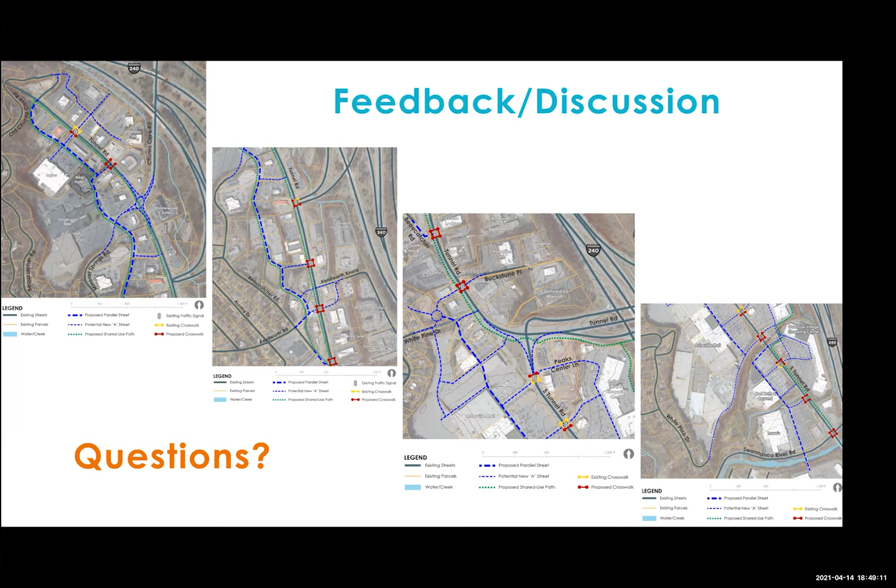And Carolyn, do you want to explain? This was on the web - you were doing it at the City of Asheville, and there was the thing about the corridors happening now, and you went to a map, and there was an aerial. I'm sorry, I know what you're talking about now - that was the extent of the study. There was just a line that followed Tunnel Road from the tunnel down to Swannanoa River. I can't pull that up right now, but that was more just showing the extent of the study.

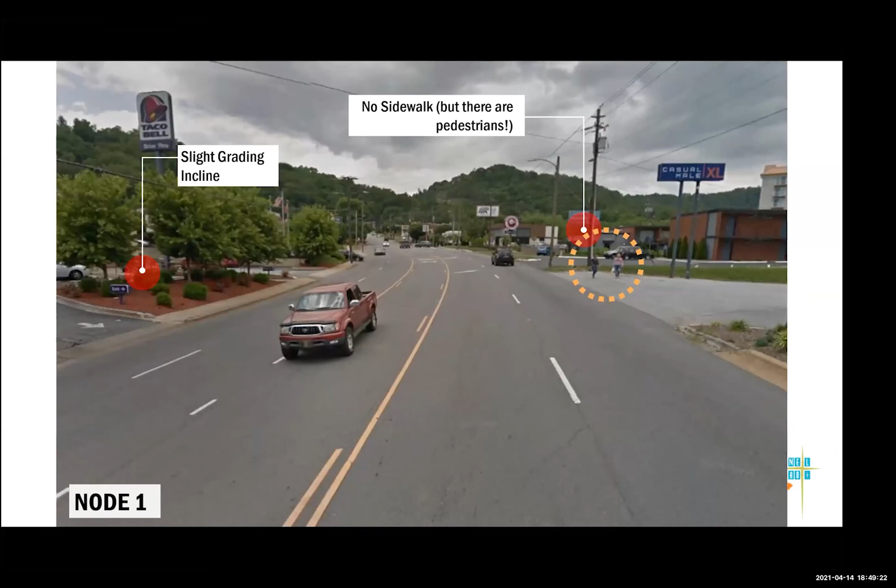I don't think we have that anywhere in here. It might be at the very beginning of the presentation. No, I didn't see it on this program - I saw it on the City of Asheville's website when I pulled up the corridor study. Just to reassure you, we're not showing any new roadways through residential neighborhoods on this, so that hasn't been added. If it was there originally, it was removed. I haven't seen that.